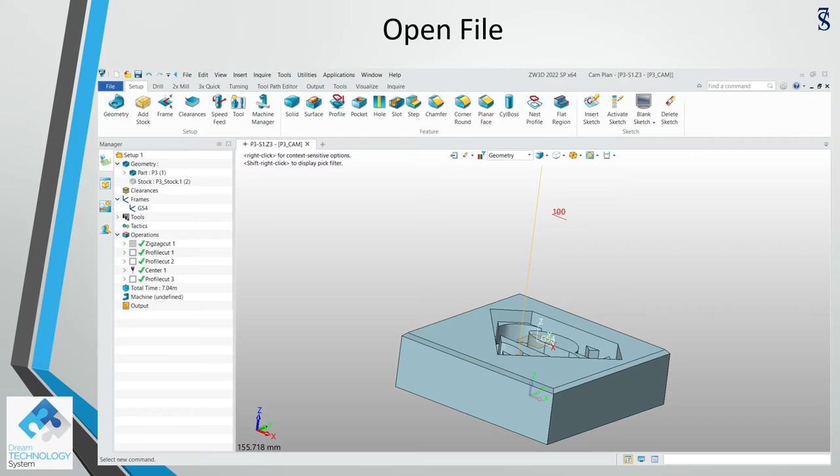Today we're going to drill a hole so that the end mill operation can carry out smoothly. As usual, we're going to open the file that we created at the last operation, introduce you a new tooling, and we continue with the lesson. This is the result on the last operation. We have created the center drill.

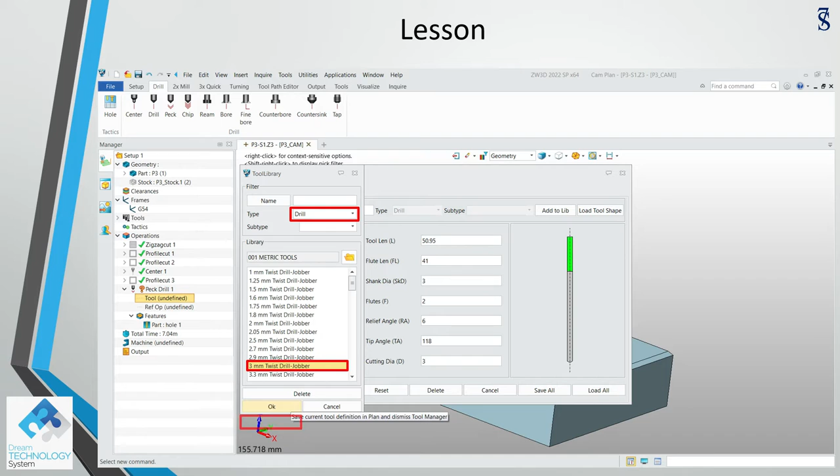We need to use this twist drill, diameter 3, to drill a hole so that the end mill operation can continue. We start with the Peck operation, then click hole 1 and select OK. Load the tool shape, select drill, and we need to use a diameter 3 twist drill. Click OK. We put a name so that it's easier for us to recognize at a later time, D3 twist drill, and we need to put a tool number which is number 5 for this tool.

We click OK. Right click mouse on the operation so that we can select edit and update the rest of the parameters. The first one is going to be the G54, the frame, and we set the RPM at 850. The depth is going to be 10 mm. We're going to use the tip because this is not a through hole. We need to use the tip to ensure that we're going to drill at the depth of Z-15.

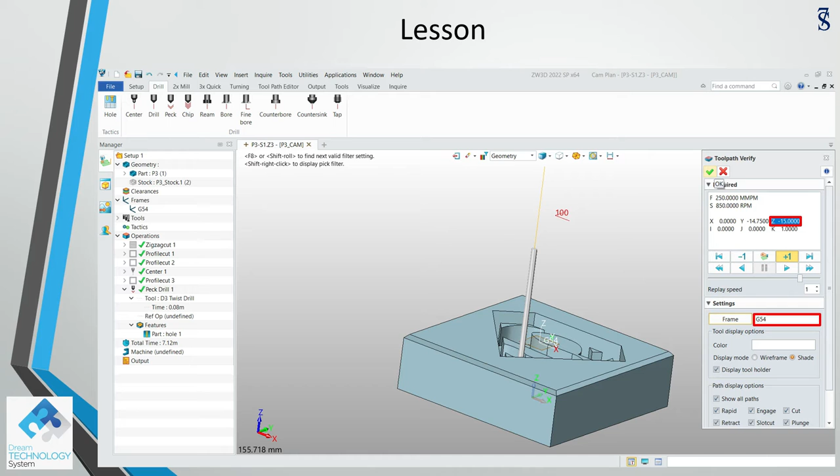Change the color and we perform a calculate. Looks good. We need to do a verification. Step by step, click the +1 button. Eventually you can see the pecking process, and finally Z-15 appears, which is correct. Then we click OK. After that we continue with OK, and we need to drag the operation upward after the center one so that the drilling operation is carried out before the end mill comes into the operation.

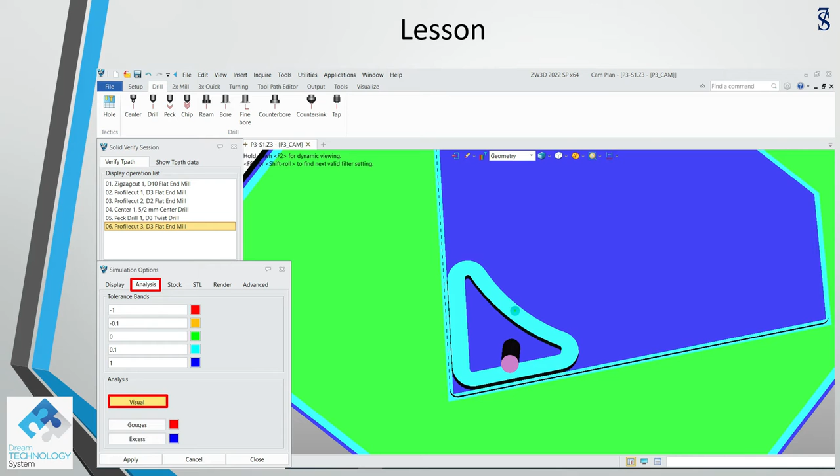Do a solid verify. Everything looks good, and we continue with the analysis. You can see there's one dot there, which is correct. The drill operation is done, but because we haven't gone to the final depth, there is a tool mark there, which is okay for this. Later on we're going to use the finishing tool to cut it off. Save the file for the next operation. We have completed the theory portion. Let me switch the screen to show you step by step how to complete the task.

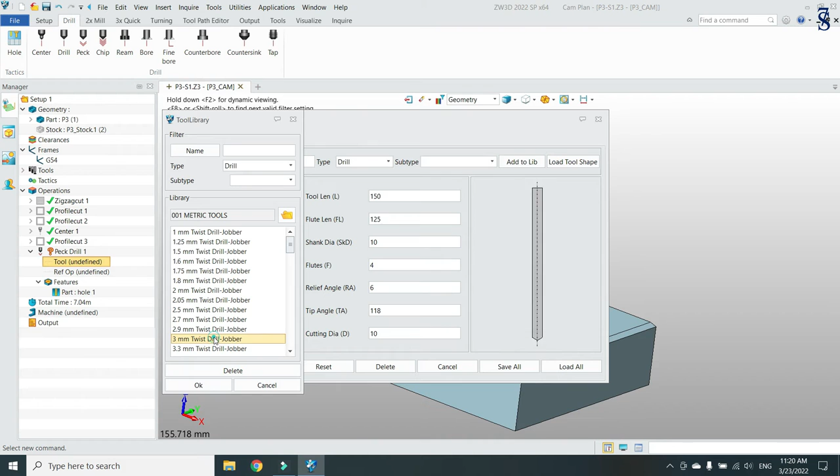Hello, welcome back. Let me show you step by step. First, we will double click to hide the previous operation, and we start the Peck operation. Select hole 1, OK. We need to load the tool, select drill, and we're going to choose a diameter 3 twist drill. We need to put a name, D3 twist drill. Set the tool number to 5. OK.

No, we're not going to calculate. Set the frame, G54, RPM 850. Change to 10. This one to tip. The rest is okay. Change the color to green. Calculate. We continue with verify. Set the frame G54.

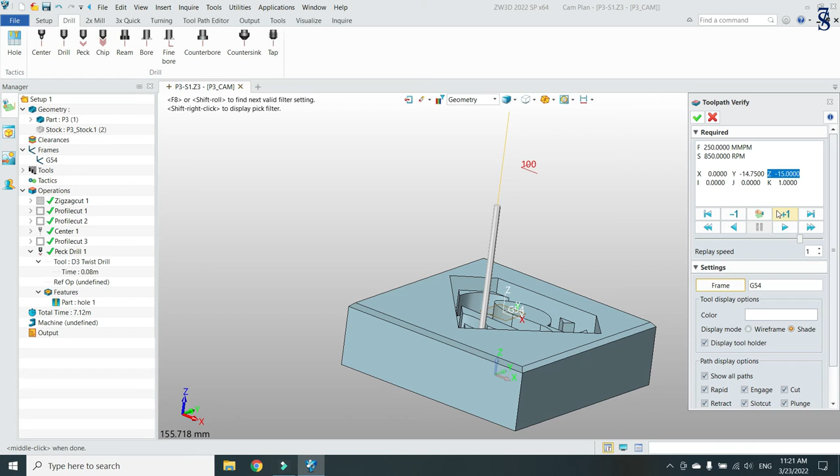1. Go to the depth -9. Continue again. 12. 15. OK. Continue. Close. Click OK. We drag the operation upward.

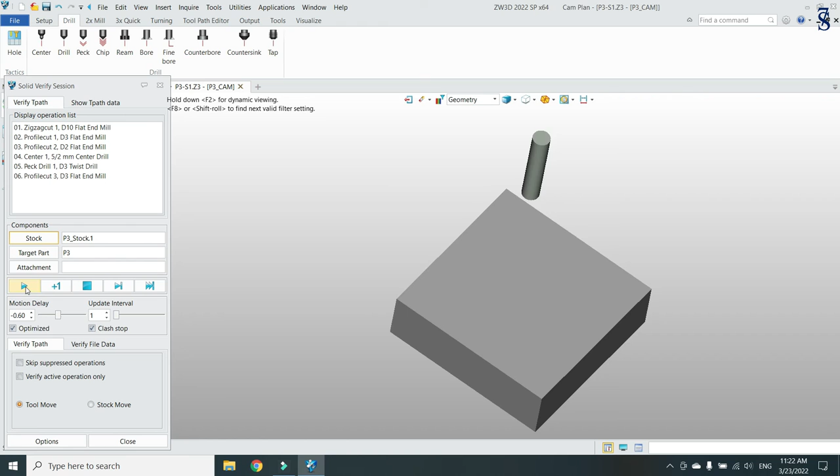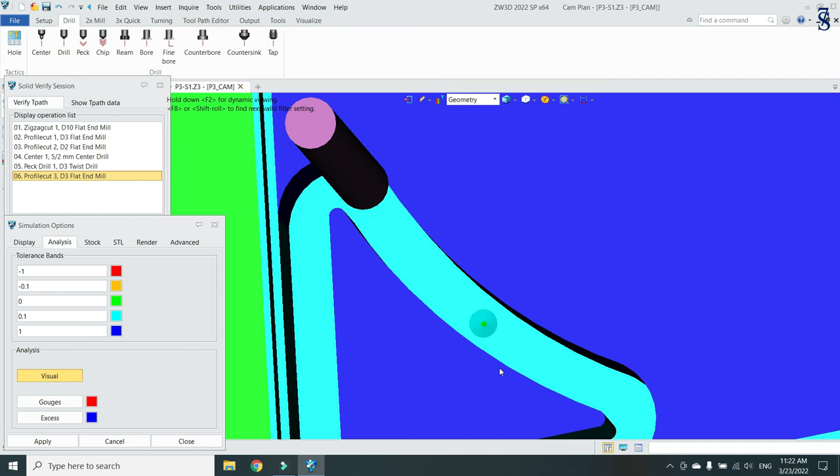Do a solid verify. Slow down the process. Tilt the angle. Play. Yes, everything looks good. Let us do an analysis visual. Let me go into the detail. Drag it up, and you can see there's one dot here. Everything looks good. We close, close, and we save the file for the next operation.